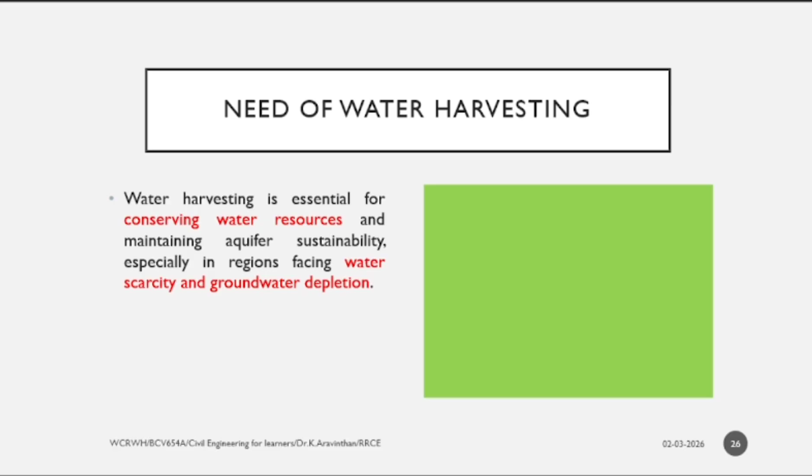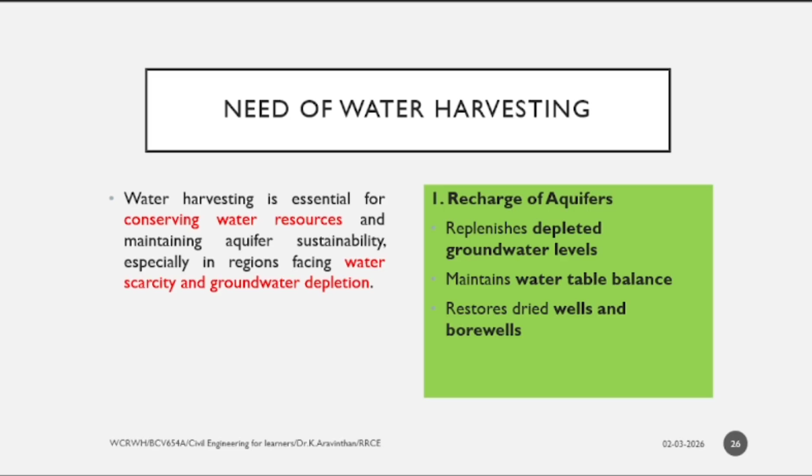How those lorry people are getting water is, they are putting a bore of larger depth, they are exploiting more, then they are giving it to you. What will happen, they will exploit everywhere and they will change the business, then they will go. Do you understand? Business is to make money. Artificial aquifers, depleted groundwater. This is what I told, groundwater is over exploited. We have to restore that water table balance and borewells.

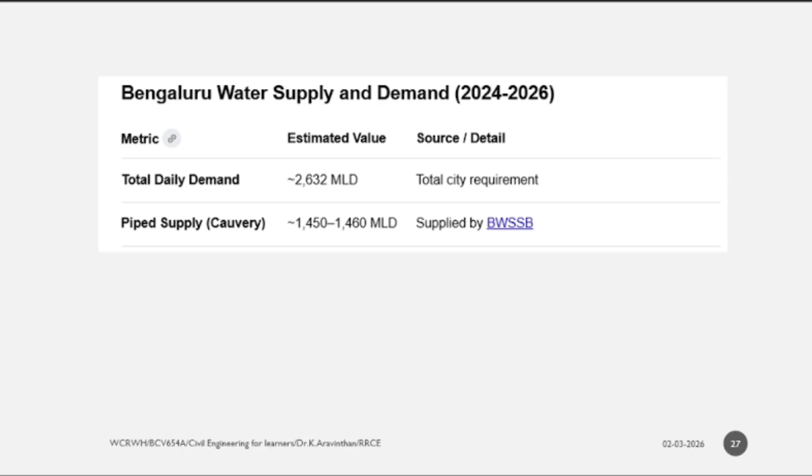These are the statistics for 2024 to 26. Who has given them? The Government of Karnataka Water Supply Board. From that water supply board, what is the daily demand in Bangalore? It is 2632 million liters per day. MLD is million liters per day. Now, most of the students said during the assignment, sir, we are getting Kaveri water. Do you know how much Kaveri water is supplied in Bangalore? Around 1450 only is supplied through Kaveri. BWSSB, there is a different board for this. For water supply, they are giving you water.

Now, 2600 is required. How much is supplied by the Kaveri water? Around 1500. Remaining is how much? In 2600, about 1100 is left. That 1100 is being extracted from the groundwater. Who is extracting? This is what I told, not only people. People are also extracting, heavily over extracted. Extraction exceeds recharge. This is what is happening.

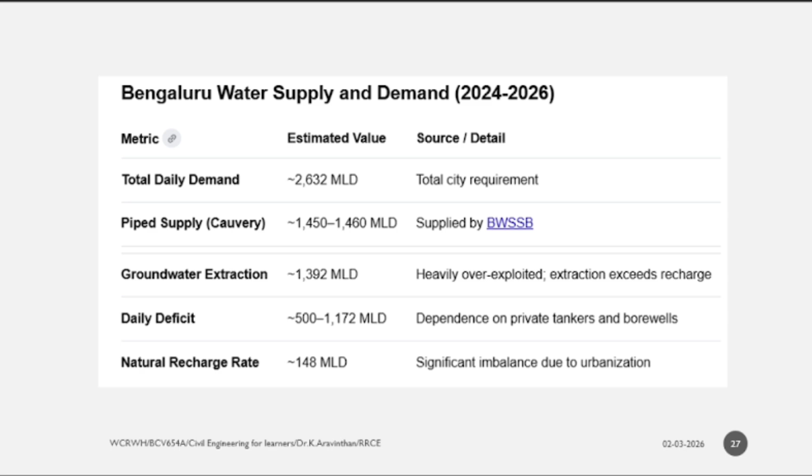Now the daily deficit is this much and the natural recharge rate is 148 million liters per day. You see, this is the demand. How much natural recharge is there? 148. How much percentage? You divide 148 by 2632, 0.06. Around 6% of water only is natural recharging. The rest is given by the Kaveri, and 6% is not enough recharging.

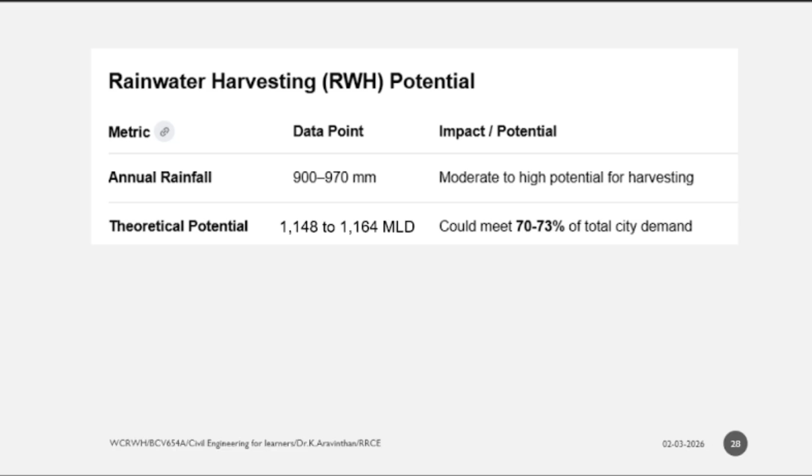Next thing, rainwater harvesting. What is the total rainfall in Bangalore? I have shown you with the graph. 890. You see here, around 900 mm rainfall is there. Now, for rainwater harvesting, currently only 148 million liters per day we are doing. But the potential is, we can recharge around 1100 million liters per day. Are we doing it? No. Only around 10% we are currently doing as rainwater recharge.

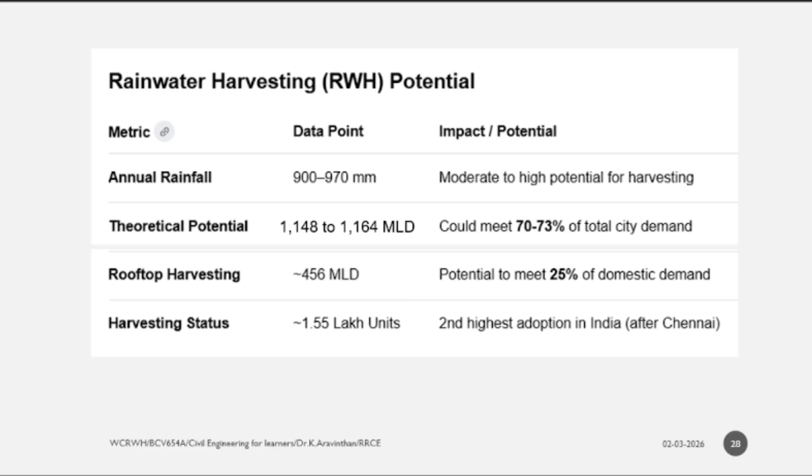Now rooftop harvesting and harvesting status. We are second. Throughout India, Chennai is first, having more rainwater harvesting. We are second in India. But this is also not enough. We need more.

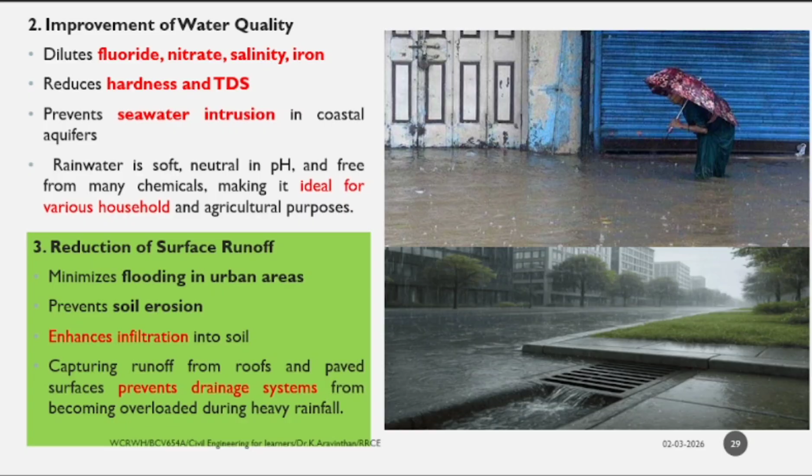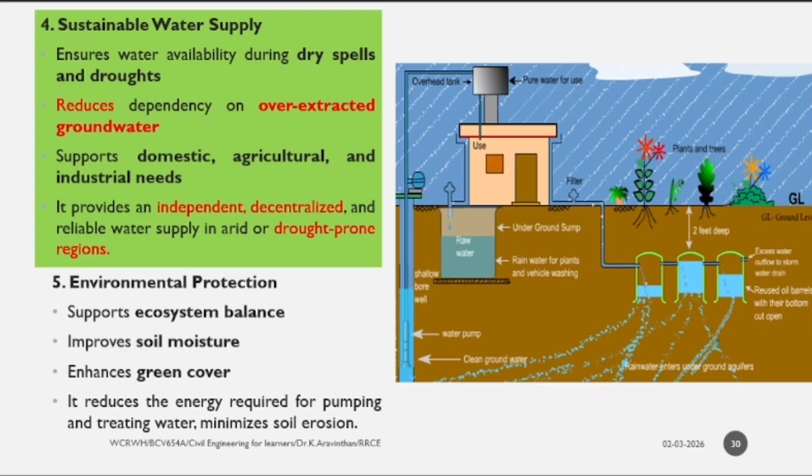Next thing is environmental protection. It improves green cover. Economic benefit is, with less cost, you will get more benefit if you improve rainwater harvesting. Now this is the urban importance.

Sir, I am having a 30-40 site. There is a new rule in BWSSB, Bangalore Water Supply and Sewerage Board. They have given a new rule which is amended in 2025. What is that new rule? Any new building which consists of a 30-40 site mandatorily should have rainwater harvesting. In any of your houses, do you have rainwater harvesting?

If you are constructing after 2025, your plan should have rainwater harvesting, then only they will sign. If you have already constructed, the government is not going to ask. But after 2025, for every house, rainwater harvesting is mandatory in order to get an occupancy certificate. So this is the amendment they have created. For existing buildings, compulsory retrofitting is required.

The capacity should be 60 liters per square meter. How much area are you having? For 1 square meter, you need to install 60 liters of capacity. Now, if you are not following, there will be a penalty and a monthly surcharge. They are supplying you water, no? Kaveri water. With that supply, they will be charging you an additional charge for not including rainwater harvesting. I don't know when they are going to implement this, but in 2025 they have created a rule.

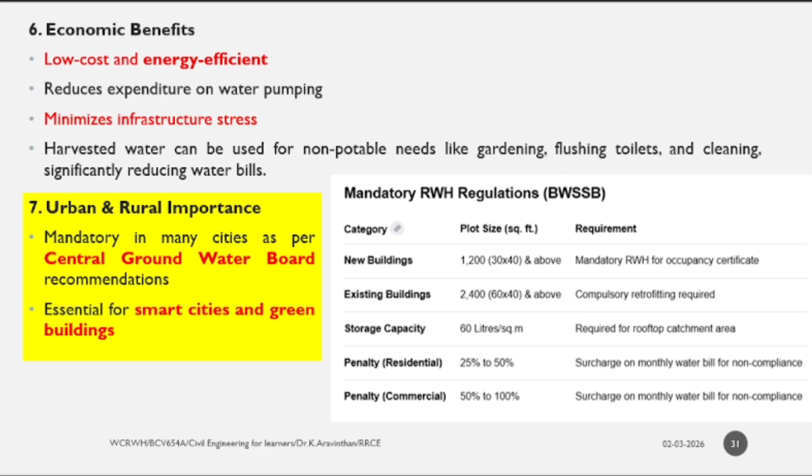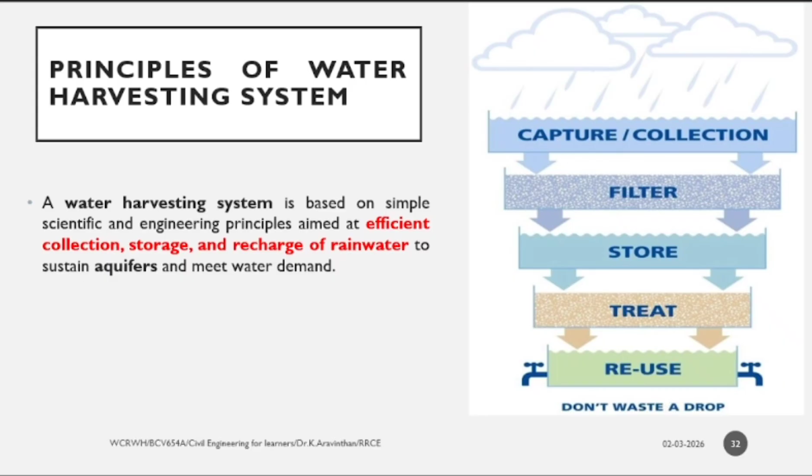Now, next thing is the principle of the water harvesting system. Sir, how to harvest water? Not only in buildings you are doing rainwater harvesting. There is a general principle. What do you mean by that? Capture and collection, filter, store, treat and reuse. This I will explain one by one. What are the core components? What is rainwater harvesting?

First thing is called the catchment, the area where you collect the water. The roof is called the catchment. And through the gutter it will flow. You have a filter here. Sir, what is this filter? It might carry all the debris, all the waste, which will be collected and filtered here. After this filter, you will be storing it here for purposes like gardening, car washing, toilets and cloth washing, etc. If it overfills, it should go to the well. So these are the components.

Sir, if I am having rainwater harvesting, the following components you should have. It should have a catchment area. The catchment area can be a roof, or it can be land, or it can be a rock. Sir, I am in a village. If you don't have this kind of roof, you can catch through the land or rock. Sir, how to catch this? This I will tell you. Nearby your house you will be having a number of ponds.

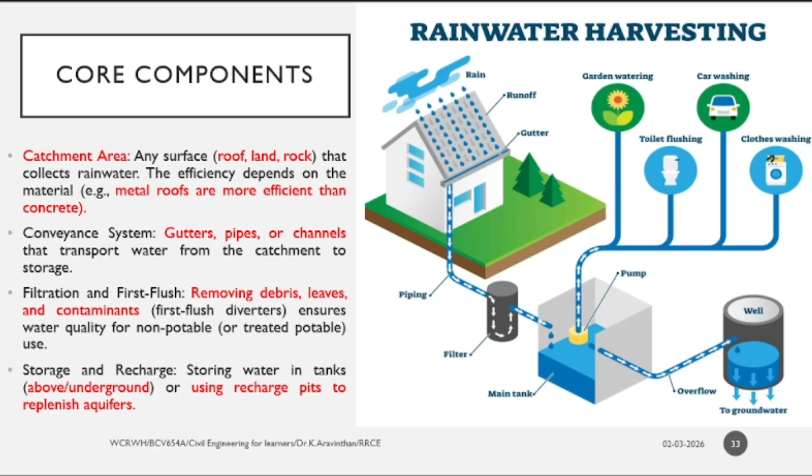Now next thing is filtration and first flush. This is what I told. After collecting, it will be filtered here, which is called filtration and first flush, which will be removing debris, leaves and contaminants. Last thing is storage. Two types of storage you should have: one for the capacity, one for the overfill.

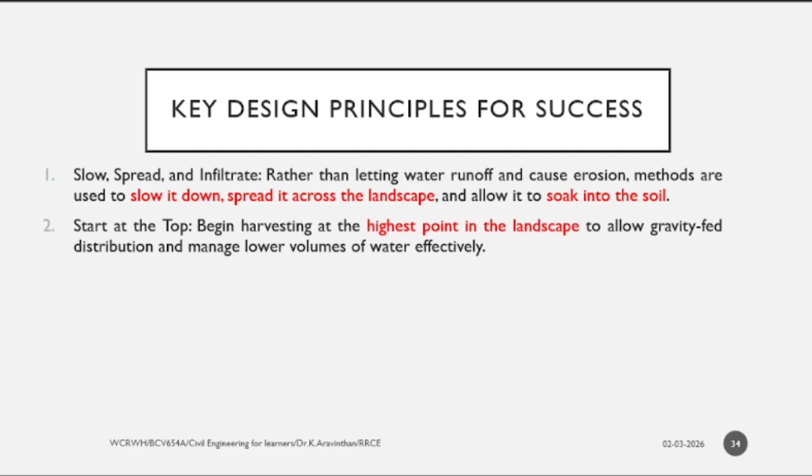Now the key design principles are: rainwater should always be collected very slowly. You should have a slope. This slope should not be very drastic. It should slowly spread and infiltrate into the soil. Next thing is, if I am installing rainwater harvesting, you should start at the top. You can even take a mountain and collect the rainwater. Multiple small strategies are very useful.

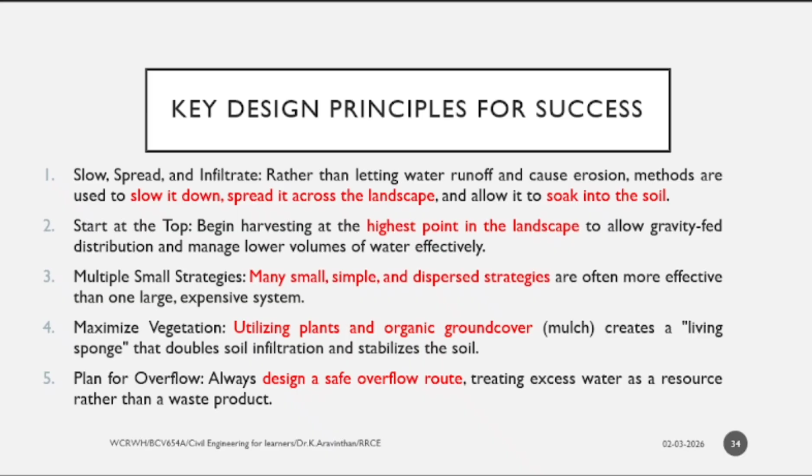If you want to do it for a village, imagine your panchayat is taking up rainwater harvesting. If they are doing it, they can collect in a place where they have the highest altitude. From there they can collect. This is called multiple small strategies. Throughout a village you can do it, or in small places, small samples, you can take it and do it. Maximize vegetation. That means wherever you have vegetation, you can use it for reducing the runoff. Plan for overflow. This is what I have told.

Sir, my house is near a hill. How can I do rainwater harvesting? Can you see? This hill will become a catchment area. More water will be there. You can take it and store it here.

How many of you have a pond near your house? Sir, near my house I have a pond or tank. You check near your house; if anything is there, there will be a catchment area. From here it will be taken and filtered in this kind of conveyance system, and here you will be installing rainwater harvesting in order to store. So this is called the catchment principle. Catchment is where you can collect.

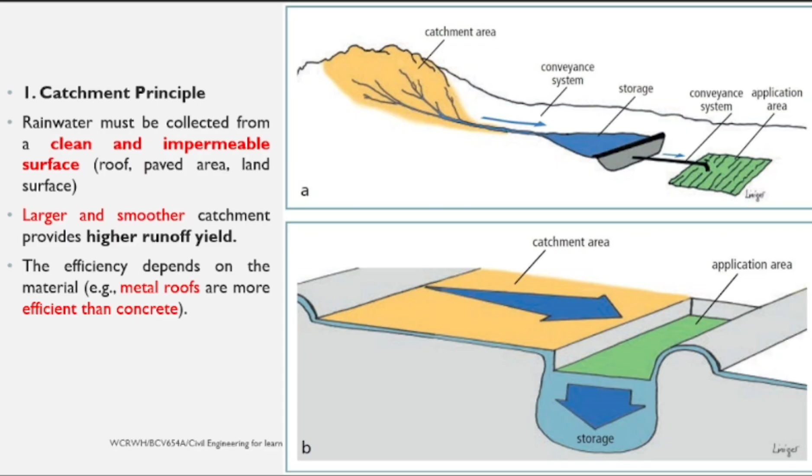Sir, is it best to collect in concrete? If you take concrete and metal, metal is more useful than concrete because it has less erosion. Larger and smoother runoff will be there. Metal roofs are efficient.

Runoff conservation. Sir, my house is around this place. I have agricultural land. Can I make my agricultural land into rainwater harvesting? Yes, you can. If you have a house, you can make rainwater harvesting. If you have land, you can make it. No need for every house to be converted. Even if you have land, you can convert. If your land is like this, wherever you have the top place, you can take it as catchment, and at the bottom place, you can make it as rainwater harvesting. This is for a plain area.

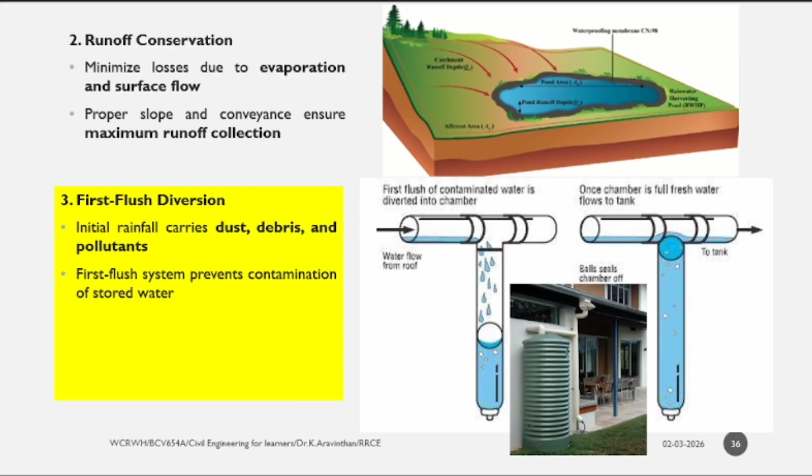Surely this question will come: what is the design principle of rainwater harvesting? How should you select? Now, like this, it will be installed. Can you see here? After the water is collected, this is the place where the dust will be collected separately, and this is called first flush diversion, to prevent contamination of stored water.

Filtration. The materials we have to use for filtration: you see sand. After collecting it, the first layer should be sand, the next layer should be aggregate, the third layer should be pebbles. Pebbles are nothing but stones. So pebbles should be at the bottom. And what will happen if the water is falling? It will take all the contaminants, and you can take the fresh water.

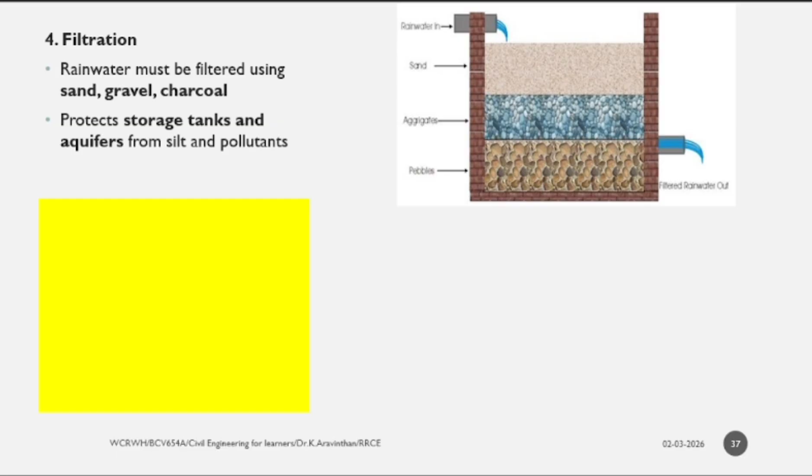This is called filtration: sand, gravel or charcoal. Some people use charcoal. Charcoal is the best filter, but it is costly. You can install charcoal also. Then you will be having a storage unit. It might be above the ground or below the ground; they can store in both places. It might be tanks, sumps or ponds, anything. So you have to collect and store.

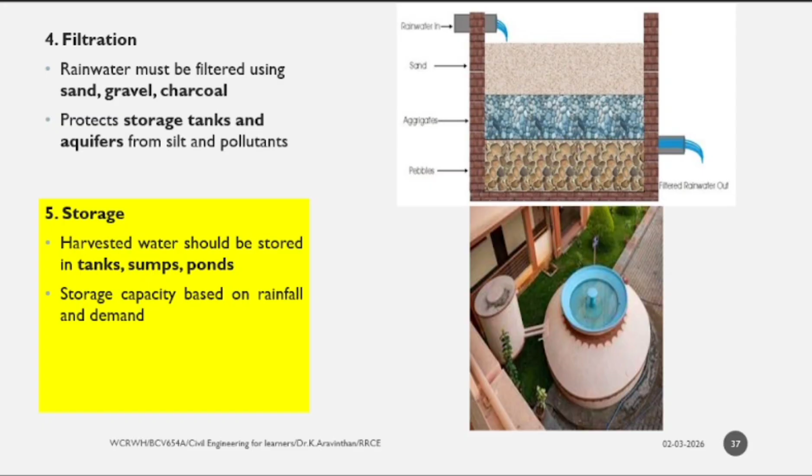Can you see, near their house they have a storage area. They can collect the water here, treat it here, and supply it to this small tank. By this, the water will infiltrate and recharge. It penetrates into the strata. This is groundwater recharge of aquifers. So near a place wherever you can store.

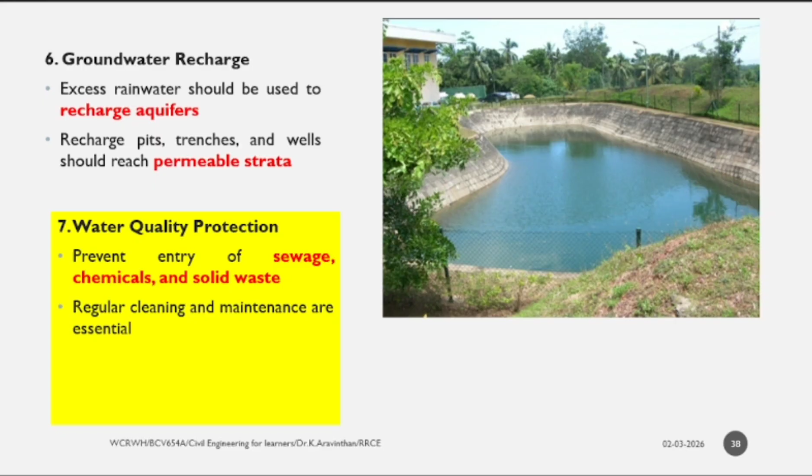And if you see here, since I am an engineer, I know, but how can I communicate with the common person? In their manual, they have given this chart. Sir, my house is 10 meters in length and breadth. If I multiply, I am calculating it in square meters. How much rainwater harvesting storage should I make? This chart gives you a simple solution.

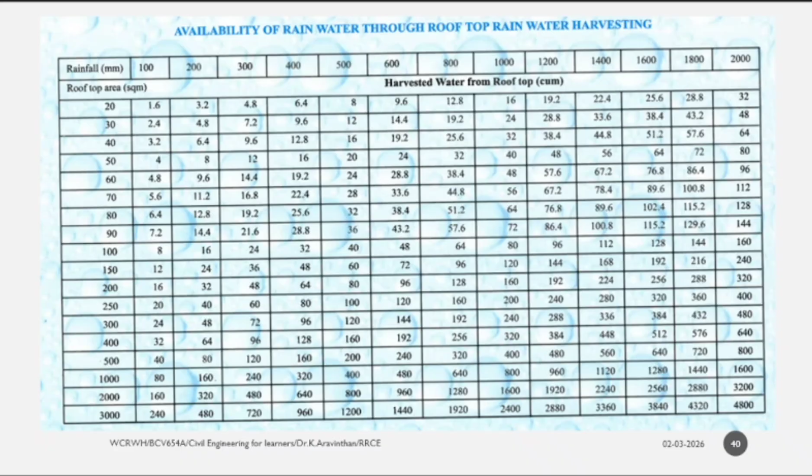For 70, what should the rainwater harvesting be? You should take 1000. What will be your value? 56. Can you understand? Your rainwater harvesting capacity for this classroom is 56 cubic meters. 1 cubic meter is how many liters? 1 cubic meter is 1000 liters. For your classroom, 56 into 1000 is 56,000 liters you can save. That much capacity you can store. So this is the way this guideline is given for all your places to store the groundwater.